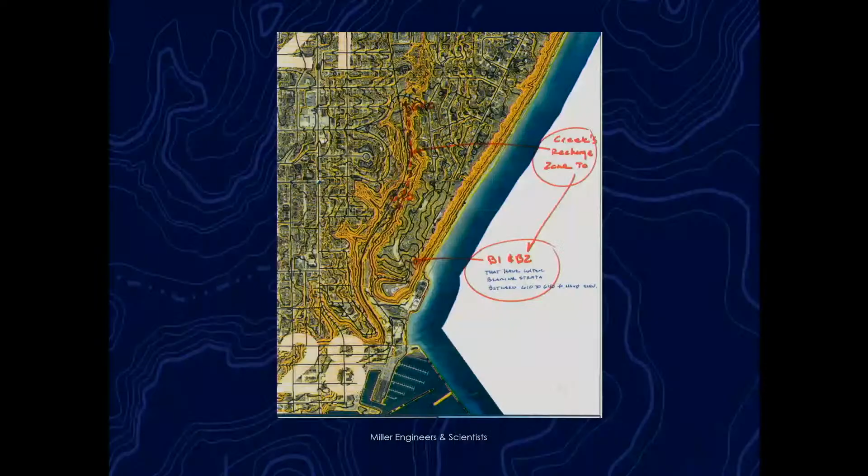So this area is relatively closed off from other groundwater options for supporting this seam. So we have a significant grade drop along this Valley Creek. And so we are expecting that the water that's sourcing this seam is from a portion of the upland of the creek, which is flowing through that sand seam and then further discharging along the bluff face itself.

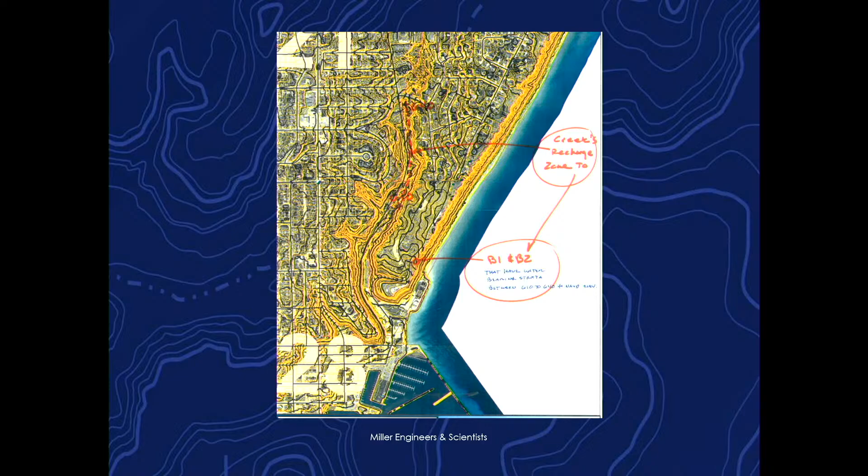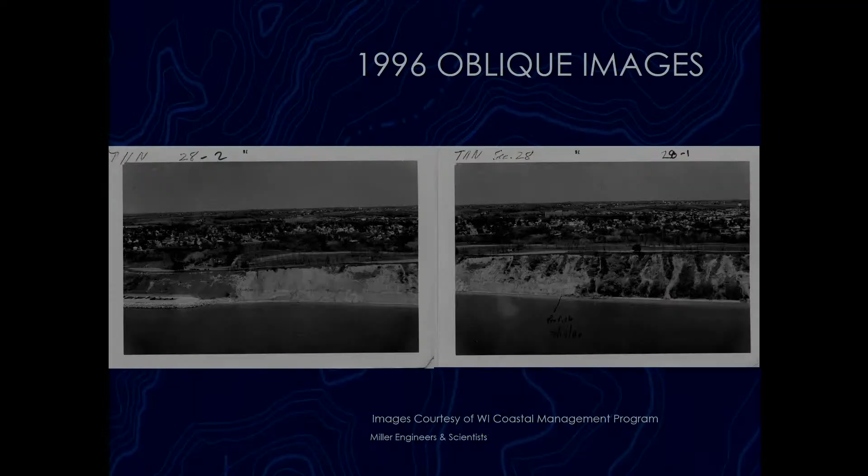The second portion of this design is grading back the remainder of the bluff so that we don't have those steep scarps along the top of the bluff, as well as rerouting a portion of the road that has been the closest to the existing scarps. This will also feature, if approved, an access path that is about 4 feet wide, and it'll be a traversing path that pedestrians can use to access from the top of the bluff to the shoreline and the beach itself, as well as a maintenance access path to improve maintenance of the vegetation along the bluff and any other options that need to be addressed.

So this cross-section shows our borings, and again, we encountered that dense saturated silt and sand seam shown in blue at the lower half to lower third of the bluff. And so because we've seen it on the face of the bluff and within the boring itself, we're confident that it's quite continuous. In general, we have spatially variable sands and seams. But because we have seen that this is relatively continuous along the bluff face as well as further back where we're having our boring, and the fact that we have this water that's continually seeping from further up north, it's a relatively continuous seam that a directionally drilled subsurface drain will be able to capture and hit appropriately.

This cross-section also shows in the dark black the current condition of the bluff face, so the current geometry of that. Again, having the steep scarps at the top of the bluff, having those loose soil masses that are at the base of the bluff. So the dashed line adjacent to it is our recommended cutback in order to create that quasi-equilibrium slope. So some of the bluff crest will be recessed back in order to provide that equilibrium slope and in order to have a safe, usable area. Additionally, you can see that there's the revetment at the toe of the bluff and the beach nourishment that we had discussed earlier.

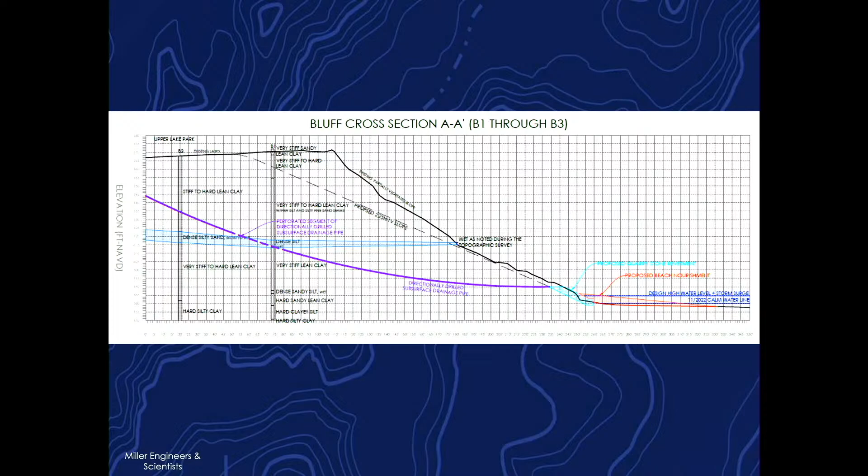So Lake Michigan, its water levels fluctuate as much as 6 feet. It's quite cyclic. Right now we're coming out of the high water level in 2020 and 2021. Currently, this says March, but also within April, we've been right at around average. So we can expect water levels to fluctuate another 3 feet down and to continue that cycle of highs and lows.

This image shows in 2020 how we have rarely any beach adjacent to the bluff toe, but that in 1990, during a low water period, we have a substantial width. So while we are taking up some space with the revetment itself, these water levels that are fluctuating are going to also fluctuate our width of the beach. And also the beach nourishment will aid in that and in creating a larger width beach.

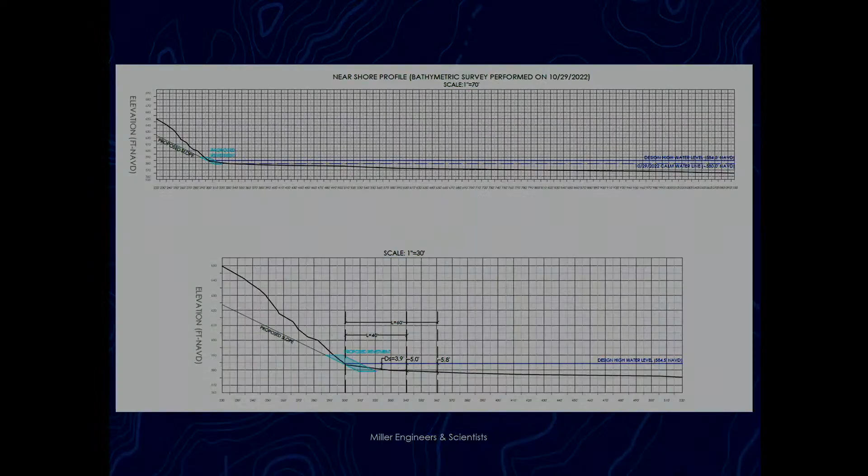So for the schematic plan that we had shown, this is our estimate of probable construction costs. To go through final design and permitting and grants, it is $150,000. We also have our directionally drilled subsurface drain lines to redirect that subsurface water and provide stability in that measure. The bluff excavation and pathway to provide an appropriate geometry. The revetment to protect all of that infrastructure from future high water levels, and the beach nourishment in order to provide an aesthetic beach and minimize our impacts to the natural lake dynamics. And that's in about the $7 to $10 million range.

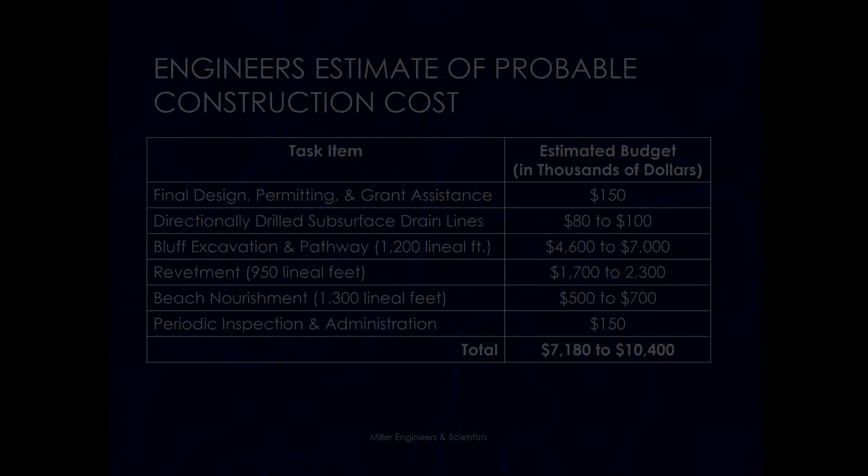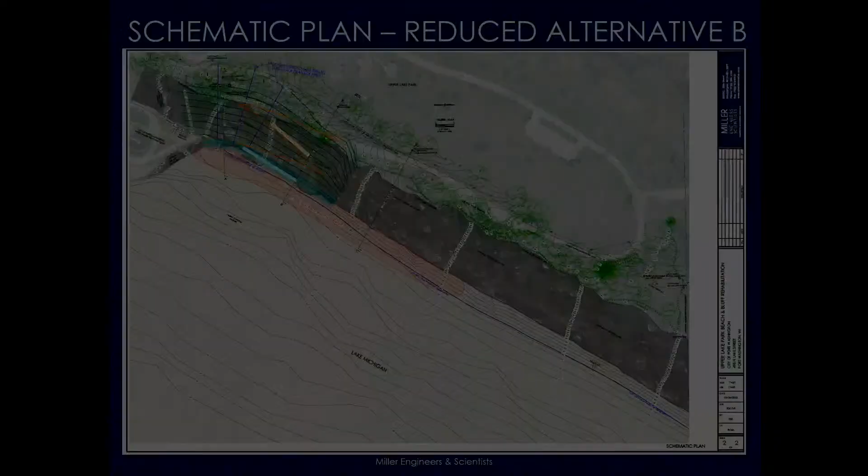Alternatively, we can also look at reducing the amount of area that we are grading back. Regardless, we're going to want to do the directional drilled subsurface drain lines in order to redirect that water. But the amount of area that would be graded back can fluctuate and is really up to the city and its constituents on what you really would like to do with that area. So this is an option in order to reduce the amount of area that's impacted and stabilized, and that would be in about the $4 to $7 million range. Sorry, yes, correct, 4 to 7 million.

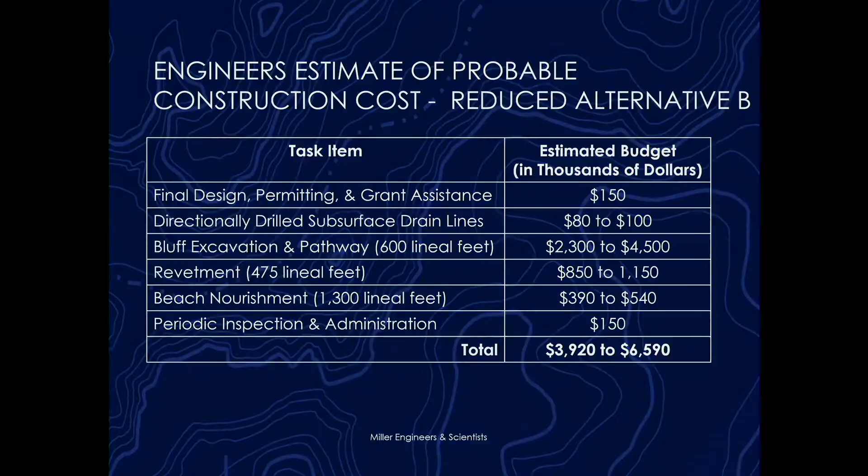So, as Rob said, this portion of the project was funded by Fund for Lake Michigan. They have also received the Wisconsin Coastal Management Program in order to do the final design and permitting of this. A Sea Grant application is pending for further research at the north end. And some additional options include Sustain Our Great Lakes, FEMA, Knowles-Nelson Stewardship. So there are plenty of options for addressing this project

in the future. So the next project steps would be to determine what financing we have for this, and therefore figuring out how much area we really want to be working with and stabilizing in order to provide an appropriate amount of beach for people to use. And continuing to have grant applications, preparing final designs, and then as a first measure, in order to provide some beach access during this summer, is to first reconstruct the portion of the road, because that can be lost at any time due to the proximity of the crest of the bluff to it at this point. As well as installing the directionally drilled subsurface drain lines to provide immediate relief from that, and some minor grading.

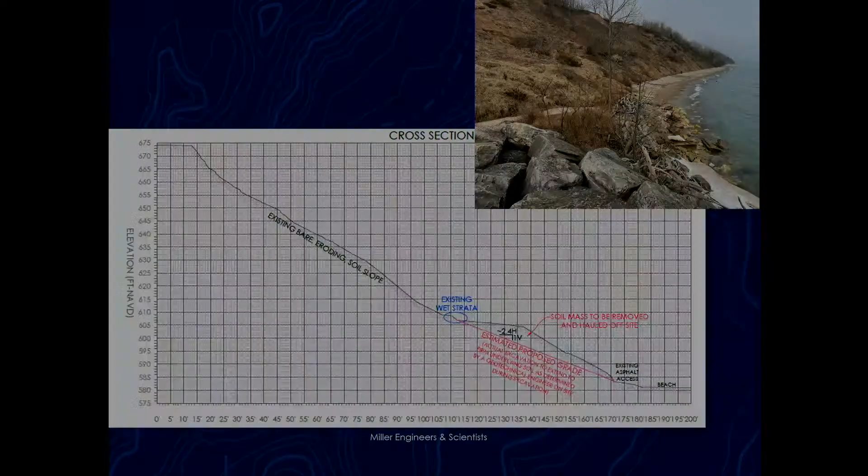So the city had requested that we provide a schematic plan for the minor grading in March of 2022. And here's a figure from 2022 showing that slump that has now prevented access from the wastewater treatment plant asphalt walk to the beach itself. So our plan would be to remove that large soil mass in order to restore that access to the public. And that is all that we have. If you have any questions, I'd be glad to answer them.

Thank you, Emily. I'll kick it off. So when we talk about the bluff instability, is the number one driver of that the drainage seam or the slope of the bluff, or both? Does that work in tandem? Right. So the two mechanisms that are causing the bluff instability are the high water levels that are eroding at the base of the bluff, which we don't currently have because we're at the average water level, as well as the saturated sand seam, and that is what creates the environment in order to have that steep slope.

Okay. And that seam, it sounds like, is pretty static. It stayed in the same spot for many years, as you showed. Correct. And why is that? It runs into harder clay, that's where it comes out, or? So these bluffs were created, and while they were being formed, you do have these random locations that are spatially variable of that silt and sand, because it used to be an old lake bed. So typically we don't see this continuous of a seam, but in this location we do, and that's why there's been chronic issues for several decades at least.

And then the drainage pipe is obviously the number one alternative that we want to do probably in any regard. What percentage, back of the envelope, of the problem does that solve? Just the drainage? Right. The boring? That addresses the further instability that is caused by water seeping. So we don't consistently have water and hydrostatic pressure that's building up within that seam. It comes in waves. So during some periods of time, we're going to have more flow into those seams, and then that aggravates it at a certain time. So that's going to help in that respect.

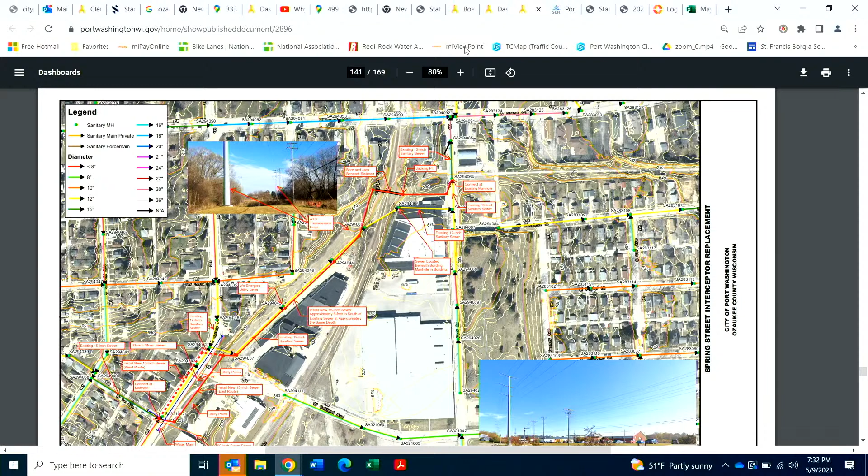And so right now, it appears there's enough budget money between the 3 years that, if their estimate for construction holds, we could do the whole thing. But really, right now, what we want to do is get the design done. We get another opinion of probable cost, and then that'll probably coincide nicely with budgeting time. And if we need to add some more money to the pot, we can do that. Otherwise, when the design is done, we can come back and go to bidding. So this is to approve entering into a design contract with Strand.

What is the cost on that? Am I missing it? So $79,000 for engineering and design. Okay. You probably have to add another $20,000 some for geotechnical engineering. We're gonna need railroad permitting. We're gonna also need some permits with DNR. So right now, though, are we only approving that 79,000 for engineering design? No, so we could get a complete design, we'd like an award for $100,000. So maybe a not to exceed 100,000, or how do we want to do that? Not to exceed would be fine, I think. Yeah.

Do you have any questions for Roger? Otherwise, we'll entertain a motion. I move to award the contract to Strand for not to exceed $100,000. We have a motion by Alderman Gasper. Do we have a second? Second by Cam. Any further discussion? Hearing none? Mr. Chairman? Yes, Alderman Sigwart.

Roger and I talked about this briefly, but they list 11 items that they're not going to do, which are actually more than what they're going to do. Okay, I'm kidding. But I just would like Roger to rapidly go through those and say who's going to do that. Yeah. Actually, it must be getting past my bedtime. I was totally prepared to do this, and I forgot.

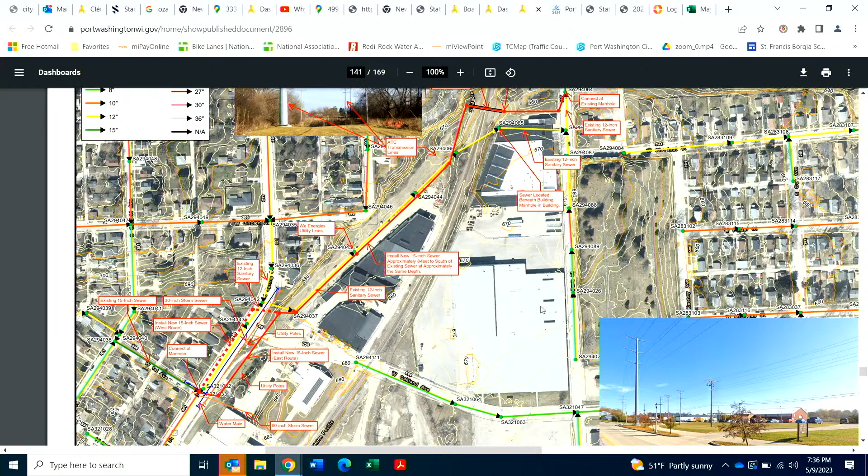Meetings with property owners, the city will do that. However good of a job we do, we seem to care a lot more than our consultants about those sort of things, and try to make our current property owners happy. So we'll meet with the property owners.

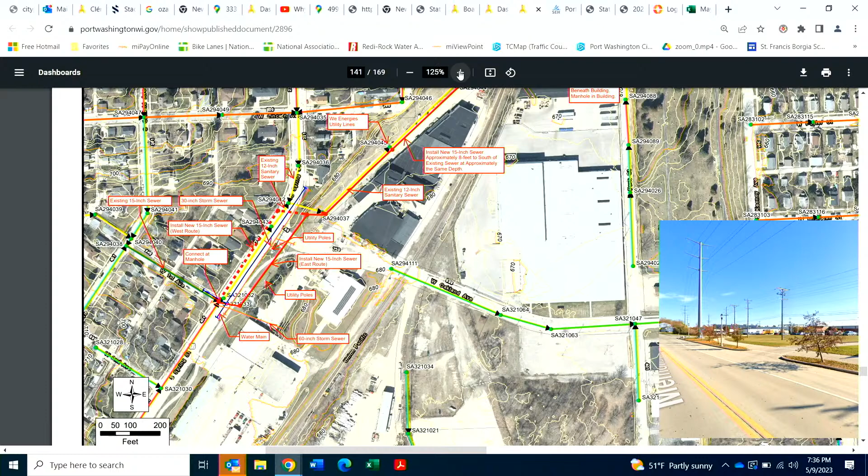We don't believe there's any wetlands out here to delineate. And since this is a connecting highway, we should not have to involve DOT with any permitting. Do those two sentences make sense to you, Roger? I'm just going to read them out loud because I think that's number 10. It is not anticipated that WisDOT permitting will be required since Spring Street, or State Trunk Highway 32, is a connecting highway. If a detour that will impact traffic closer to County Trunk Highway LL going south is required, then state review will be necessary. I don't understand that sentence.

Yeah, I think if they're thinking if they put a road in there, we'd have to divert traffic off of Spring Street. To LL. Yeah. Okay. Then we need it, but our thought is that we should be able to maintain traffic flow through there with some control. I was going to say, I think what they're getting at is that if we need a detour route, as a connecting highway, it's only to a little bit past or right around Portview Drive. That's a connecting highway. Beyond that, it is a full state highway.

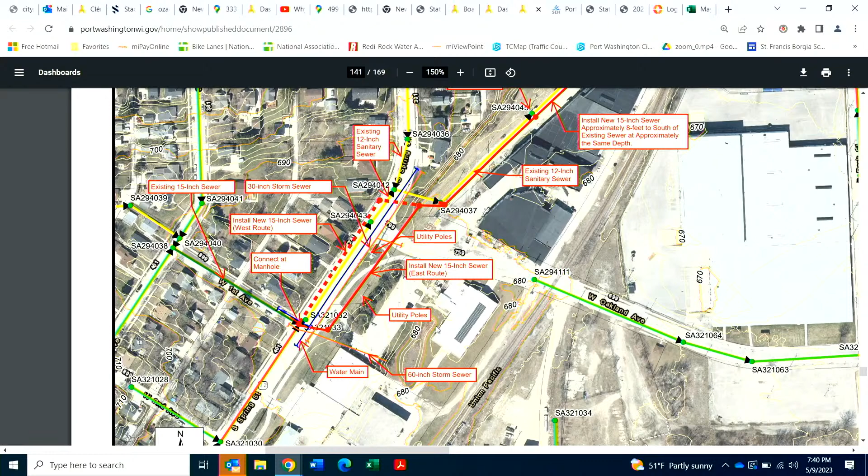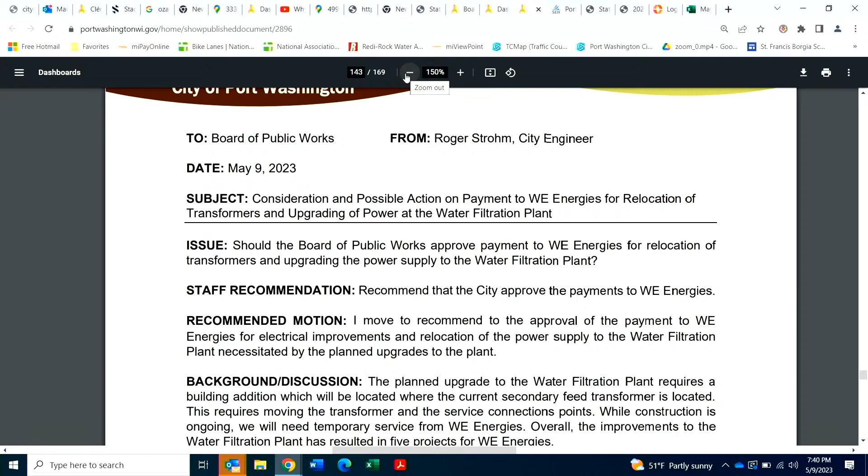Moving on then to item E, consideration and possible action on payment to We Energies for relocation of transformers and upgrading of power at the water filtration plant. I could probably mostly blame this project on Dan Fisher, but with all the upgrades to the water plant, the first things that need to be done is moving the electric lines, the transformers, all on the south side of the plant, and the service connections to the plant on the south side. All that stuff needs to get moved.

And so We Energies has broken it down into 5 projects, which you see here, and that's their cost, and they won't start till we pay them. So we're asking for permission to pay them. And where will the funds come out of? Is it budgeted in?

It'll come out of, essentially right now, it'll come out of water reserve funds, but it'll be part of the $18.3 million capital project that will reimburse that once that loan comes in. Okay. Seems pretty straightforward on this, right? Nothing we can really do about it, right? I mean, we need power. Yeah, okay, so we need to raise our $300 street opening fees to make up.

Okay. And what's that total cost again, Roger? For the, $71,916.68. We have a motion to approve the cost to move the power lines from We Energies for $71,916.68? So moved. Motion by Jim. Do we have a second? Second by Alderman Tierney. Any further discussion? Hearing none. All those in favor? Aye. Opposed? Motion carries. Okay, thank you, Roger.

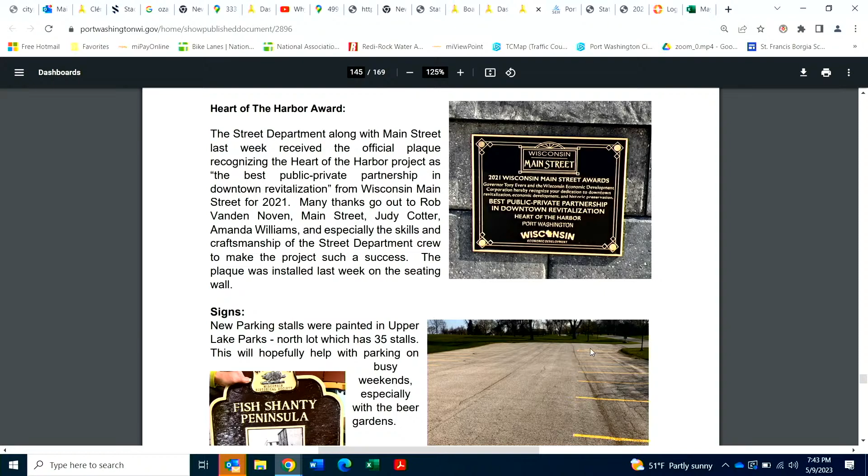And it couldn't have been done without our street department, who took that design and was very innovative in its construction, and spent a lot of our staff time putting it together. So it absolutely positively deserved the award for the best public-private partnership in downtown revitalization ever. So I threw in the ever. We could maybe put that up. I agree. Anyhow, it was a Hall of Fame type of project. So it really was a pleasure to work with Main Street, and I think they feel the same way about working with the city. It was seamless, you know. Yeah, what a great project. I never worked with a better group of volunteers.

On the north side of Upper Lake Park, we've now striped the parking lot so that hopefully that'll encourage people to park off-street rather than on the street, which has been a problem for some of the bigger events up there. We're getting into summer, and so Gerard and Casey are busy improving sewer structures around town. Over the winter, they remodeled the mechanic shop and I think the wood shop too. Brush, to JD's chagrin, is back in business, brush pickup. So we're out there, took 2 crews the full week to pick up the brush that people waited all winter to put out on the curb. So we're out now every other week until June, right?

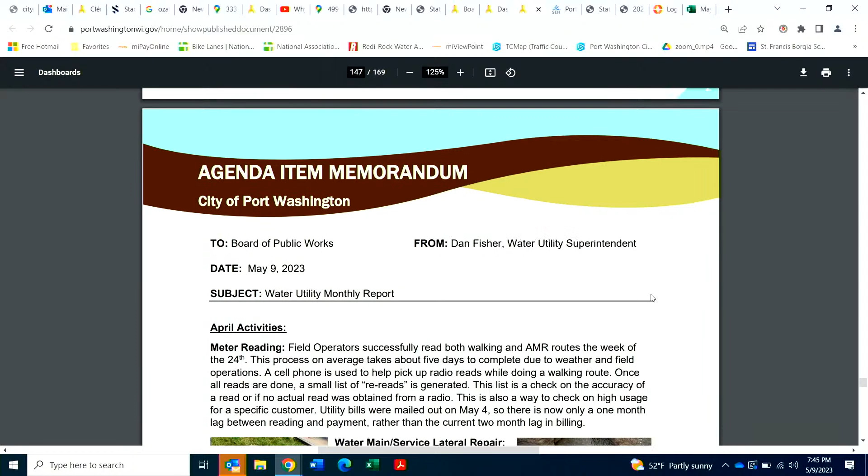First week of June, when we get our summer help, and then the summer helpers staff the chipper, and they go out every single week, which is, I know, greatly appreciated by our residents, and so we'll be out every week, essentially June, July, and August, and then it goes back to every other week until, I believe, the first or second week of October. All the, yes. Yep, so, and so, appreciate that, JD.

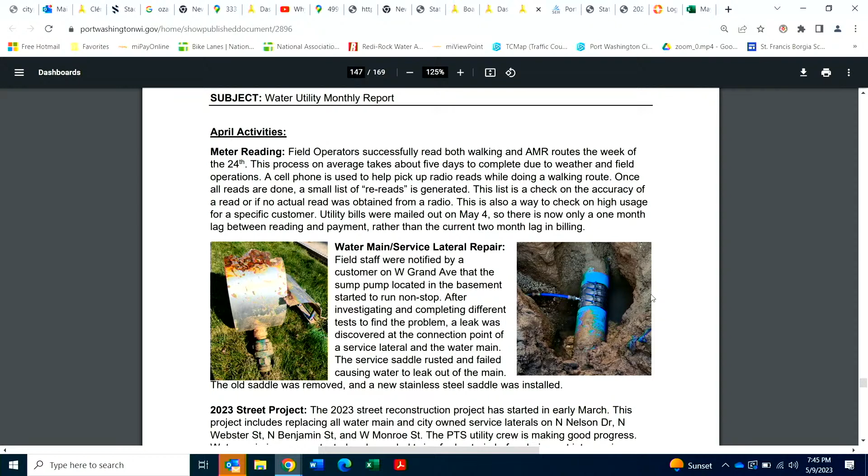And in our water utility, we had a difficult water main break on Grand Avenue a couple of weeks ago, and I'll just skip to the end of the story. It works now, so. But it was a great amount of effort put into repairing it, and so in the end, it worked out great. Super happy to report that our advanced metering infrastructure is in place. So the antenna that you approved last year is now up on the Mineral Springs Water Tower, and so we're just a few years away from having a complete automatic continuous read system out there. I understand it's working exactly as planned, which is a good thing.

And then moving on, I'm going to ask Dan to step up and just talk a little bit about the consumer confidence report. We have minimum reporting requirements every year that's covered in the CCR. But I think Dan put a little extra effort into it this year, and it is up on our website. I'll just say, take it away. Yeah, I'm just going to give a couple of highlights of the Consumer Confidence Report. It's also called the Annual Water Quality Report. This is mandated by the EPA. It's also run through the DNR as well.

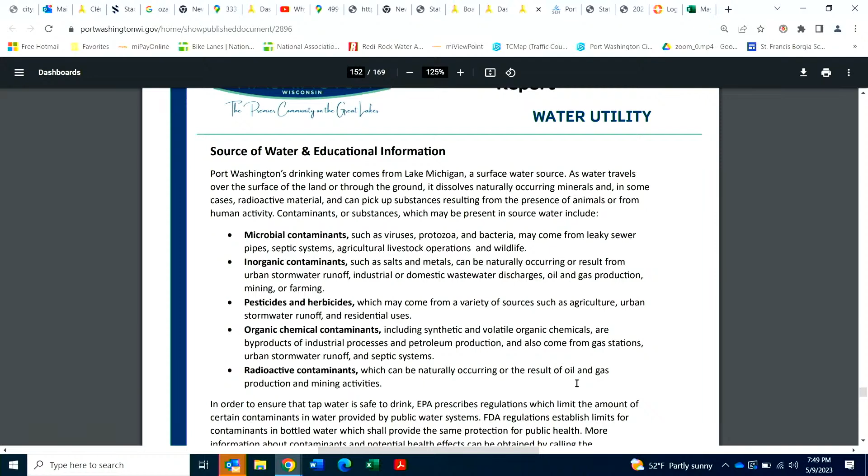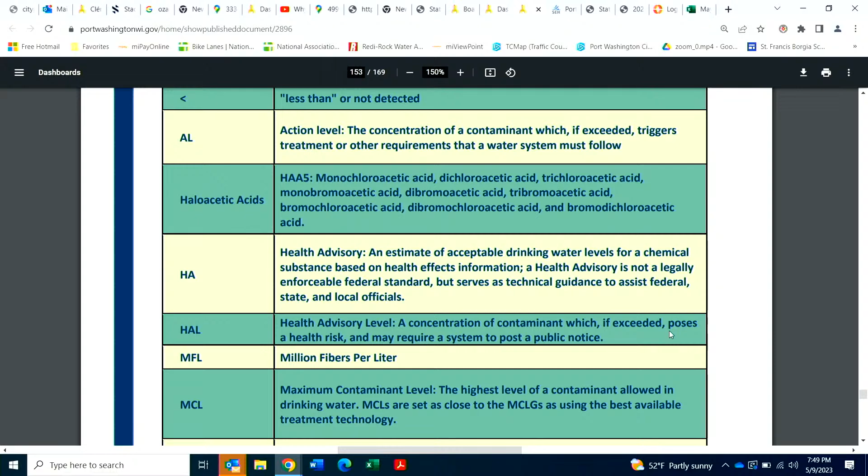And then the main part of this is showing what possible contaminants were detected during testing. Every municipality detects contaminants. It doesn't mean that they are harmful or that we are exceeding any kind of limit. So there's different types of chemicals and byproducts that are sampled throughout the year. This year, unlike last year, we'll be sampling a lot more heavily on unregulated contaminants. So that's basically the DNR searching for problems.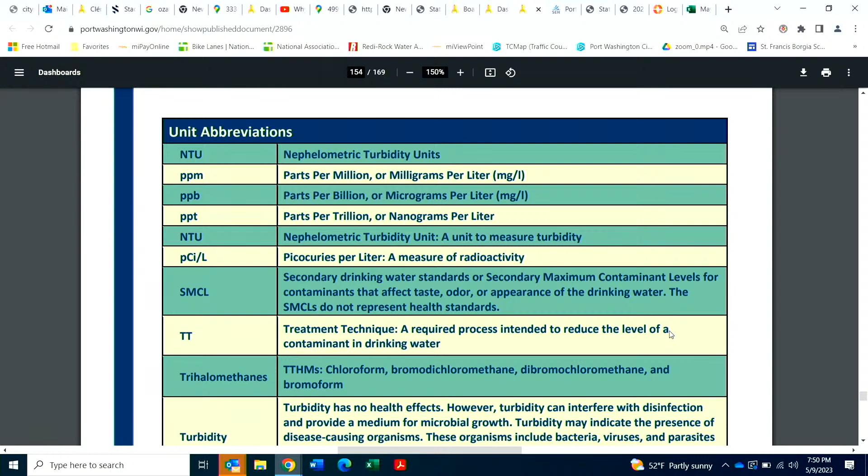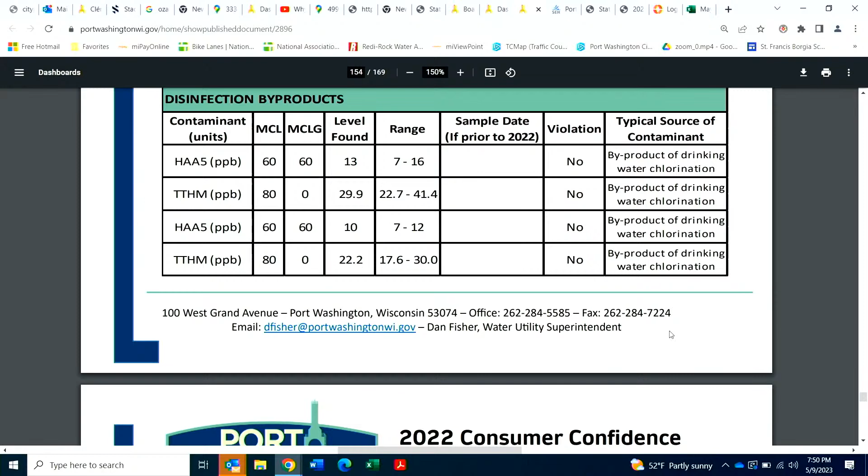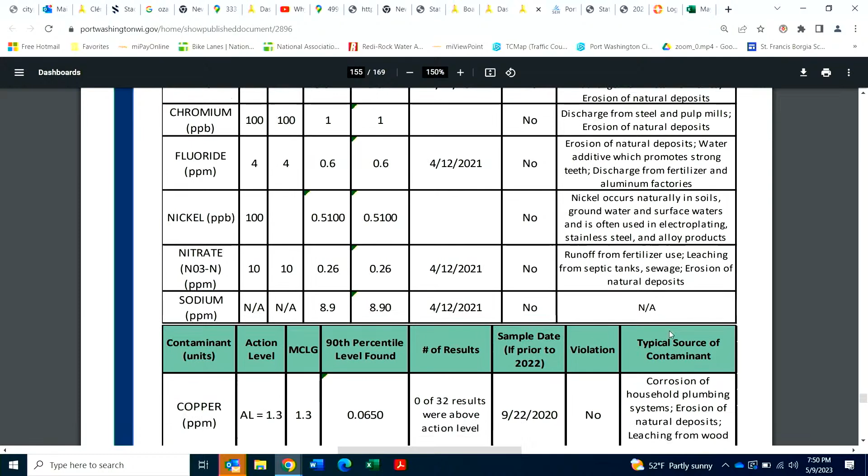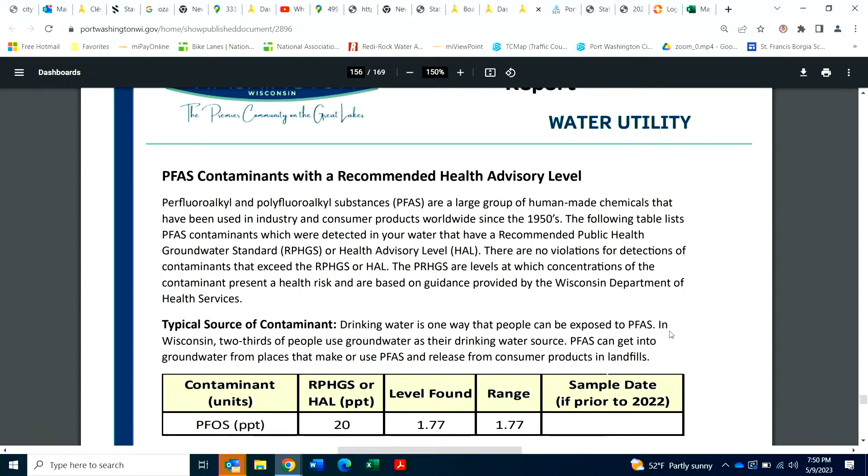And we're also sampling for PFAS. Last year, we took a voluntary sample in the second quarter. Those are the forever chemicals, right? Right. And this year, EPA is mandating that every municipality test quarterly. So actually, we have now 2 quarters worth of samples, along with 2022's results. I'll probably come to you guys a little later with more information on that. Just a peek, we're sitting in a good spot. So we have to show what contaminants were detected, but like I said earlier, nothing went outside of the range causing any concern.

And then at the very end, I just wanted to highlight what the utility accomplished last year, and what we're looking for this year in 2023. Obviously, with the water treatment plant improvement project, it's vital to get all this information out to the public and let them know the process of what's going on and if anything will affect how the water is going to be. So, any questions? Any questions for Dan at all? Thanks, Dan. Looks real good. Appreciate it. Thank you.

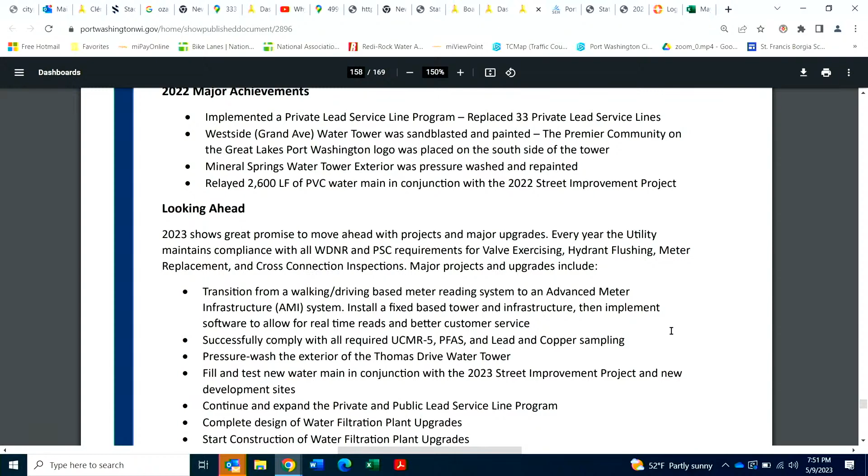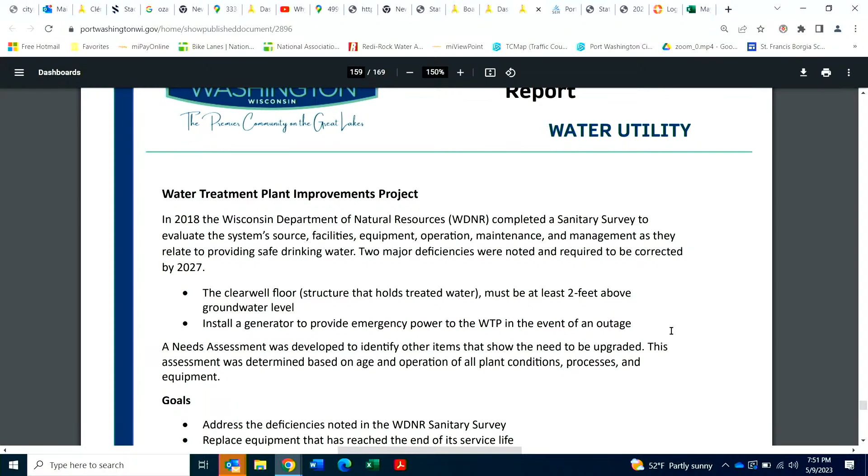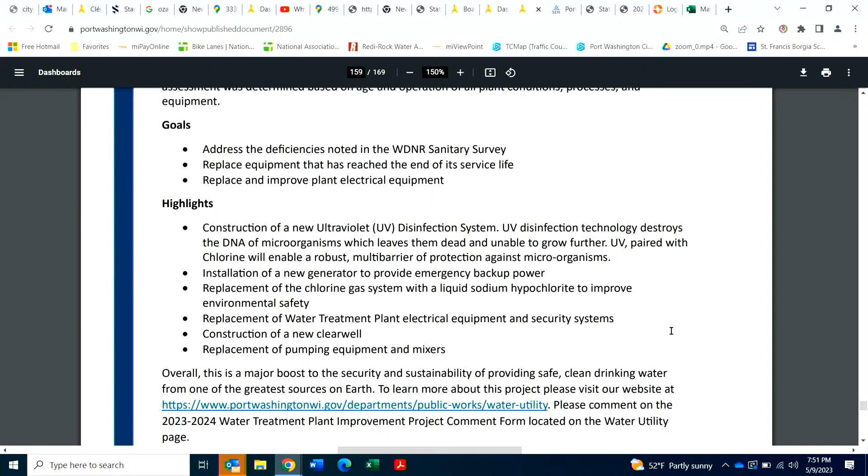Alderman Sigwart. Yeah, I just wanted to comment on the new water bills. They're excellent. I was actually able to explain them to my neighbors, who thought that they got billed twice in a row too soon, because you sent the bills out on May 5th and they're not due until the 28th of May. Right. So now we're reading and then sending the bills out and having them due at a much more normal pace. I'm glad you brought that up. I also want to say that this report is listed on the bill. We have to somehow get it to all the customers, and one of the options is putting it on the water bill, both printed and electronic ones.

Good deal. Thanks, Dan. Yeah, so with the new billings, our new treasurer, Mark Emanuelson, has now put the water utility in a position where they're collecting for water bills with only a 1 month lag time. There used to be a 2 month lag time. So it's in part because of the new way that we are reading meters and getting information to our treasurer.

Jason, can I add a comment here? Yeah, Roger, go ahead. On the CCR and what Dan put together, if anybody thinks that this is routine, piece of cake, everybody does it, I would just suggest that you Google Jackson, Mississippi, and go on YouTube and see what kind of situation they have had. We certainly appreciate the support to do the water plant upgrade because we don't want to be Jackson, Mississippi. I assume they're having problems.

Yeah. Okay. I've been there. It's hot.

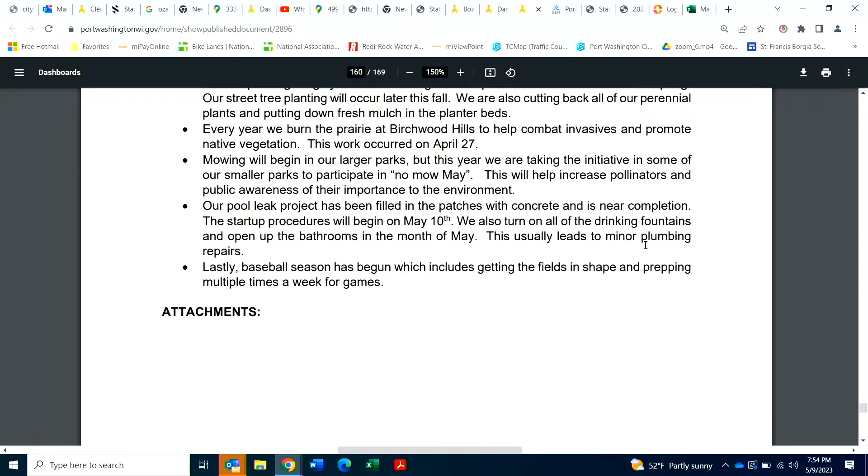Anyhow, no, we're doing a little more. It's something I'm seeing they're doing, I know, in Cedarburg, and I heard about it in Door County, and I know a number of communities are promoting No Mow May.

Looking for a no shoveling month in the winter. Yeah, no shoveling January. It's got to help something.

I don't know. And so here we have to take down the lights. I know the lights are appreciated by everyone downtown, but if we leave them on, they will eventually burn out and look bad. But beyond that, they're not good for the trees to leave on. So we do need to replace them every year. And so we essentially take the summer off. They do spend quite a bit of time putting them on in November, and so once a year is pretty much all our staff can handle.

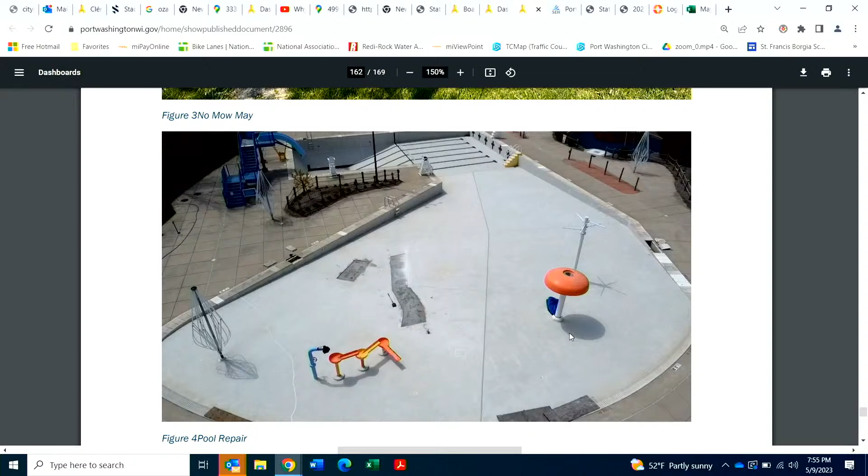So they cut pipes out and installed new pipes. They did all of that last winter. And then last week, Thursday, we put concrete down, but did leave down like half an inch, and the top is what we did today. So leaks fixed. It should be warm enough to swim in the next couple of months. Yeah. All right.

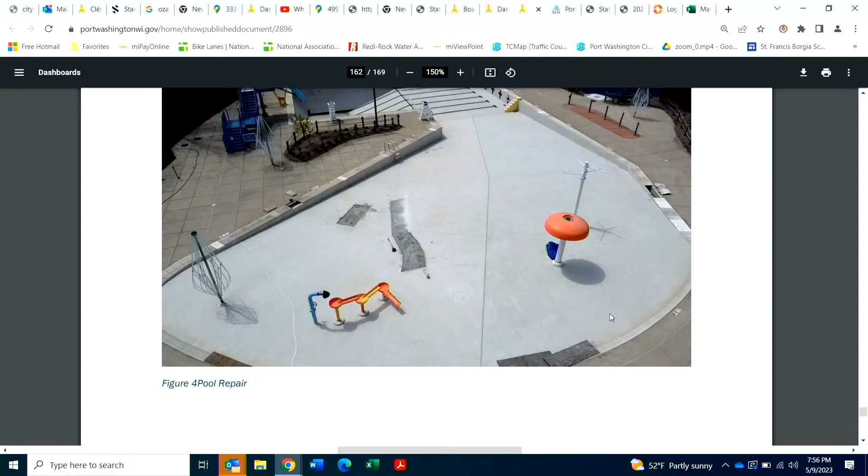Well, the retaining wall, you're talking about the retaining wall that's holding up the planted beds, is essentially failed. It should have never been constructed that way, but it was. And to fix it would either cost a private contractor $80,000 or we find time with our own staff, which we're very limited on, to do it ourselves. And so we essentially have it blocked off because it's a danger. It could topple over at any given time.

And so it's something we're trying to work in, but it was not a budgeted item, in terms of staff time or dollars. So it's a bigger project than it would probably appear to the casual observer. I guess I'll just put it that way. We don't like it either, but it's a big project. Isn't there more of a Band-Aid approach to it rather than a full-fledged one?

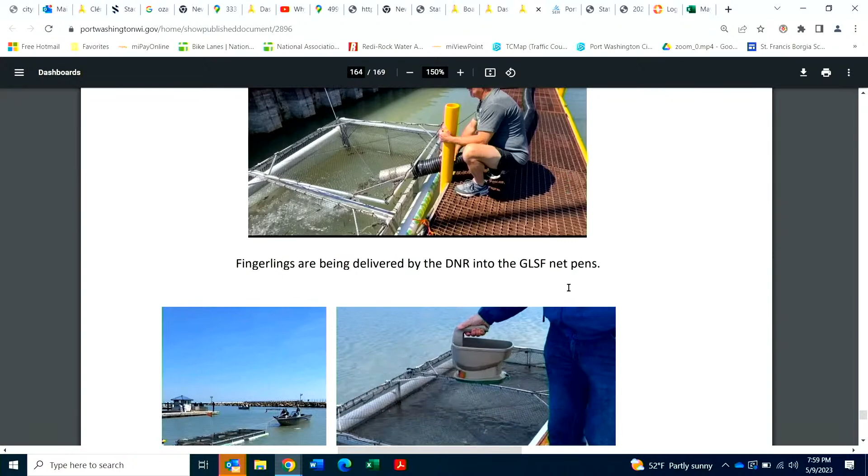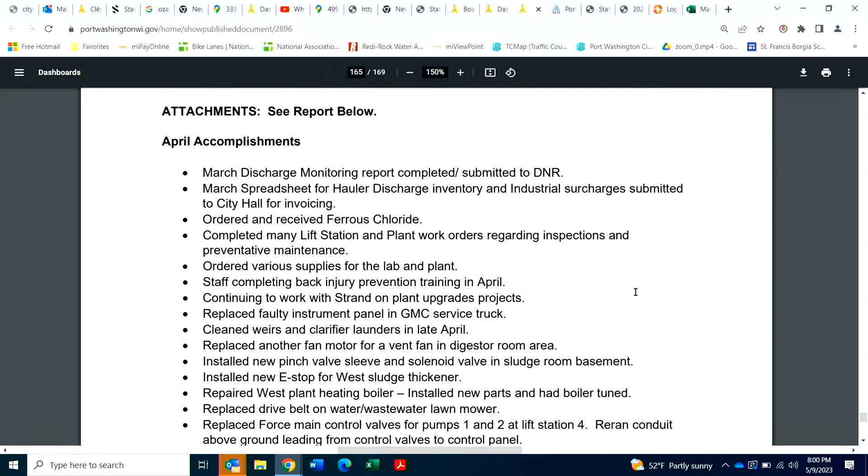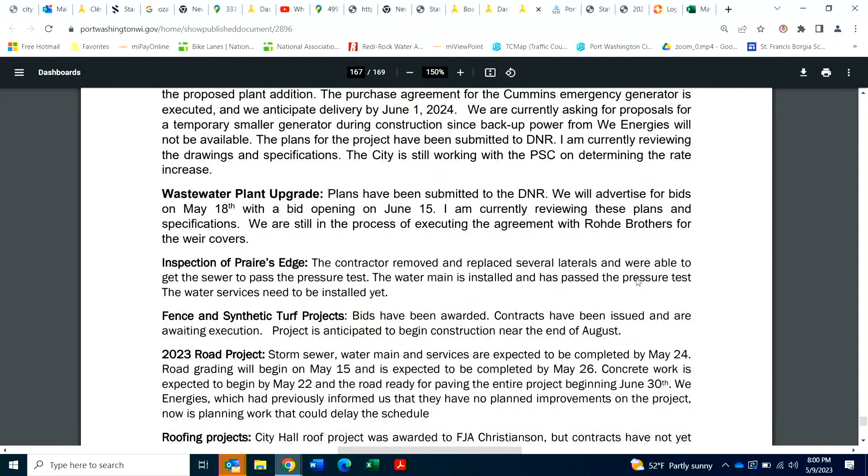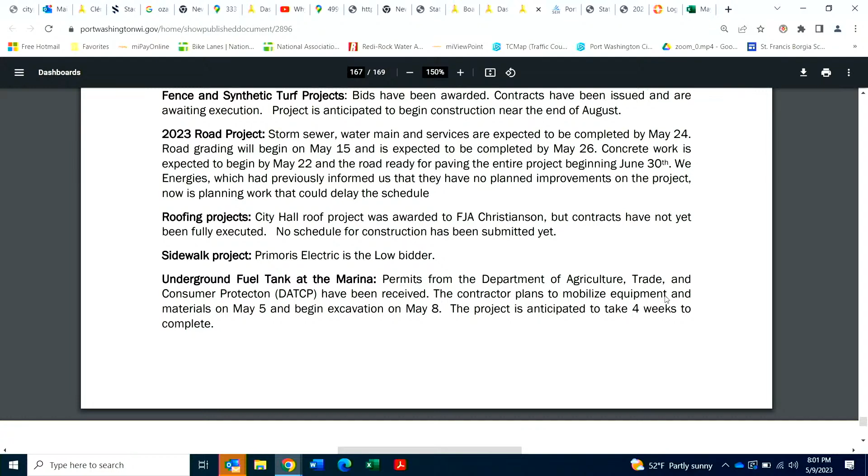And then finally, Dan's report here. No offense, but there you go. And as well as engineering. I'll just highlight that the street improvement project is moving along on schedule. I think the only issue we're concerned about is how long We Energies is going to take to relay some gas mains on the project. But if that goes according to their plans, we should have the project completed on time in July. Oh, and they started putting in the fuel tanks at the marina yesterday.

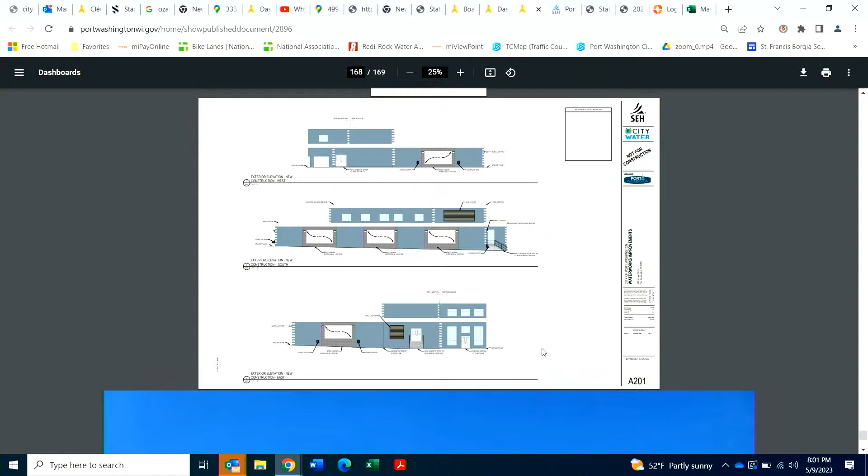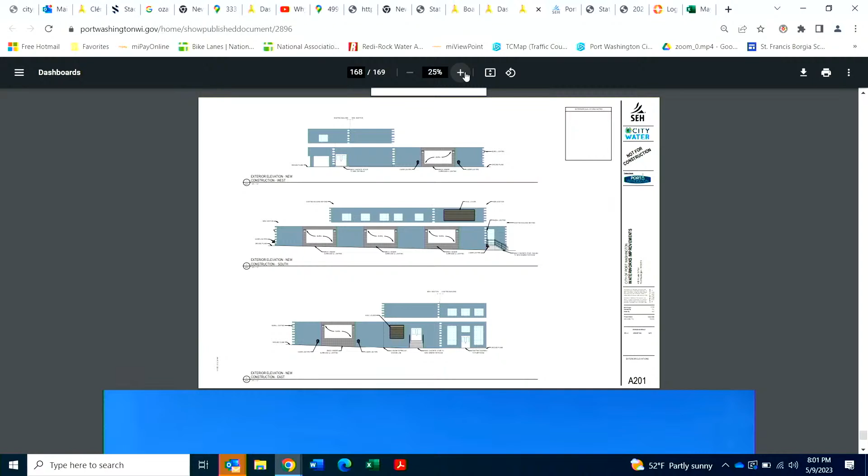And then real quickly, I think this will be the last thing we have to talk about, but we had a public information meeting for the water filtration plant last night. It was fairly well attended by interested parties over at Newport Shores and at the high rise. And so this is one of the renderings, gives you the west, south, and east elevations. We can't put windows on this building because this is essentially the holding tanks for the clear water. So we're proposing some murals. Those have been well received. The new paint color has been well received. We're matching the exterior of the building. The brickwork framing the murals will be the same type of brick that's on the front of the building where the fountain is.

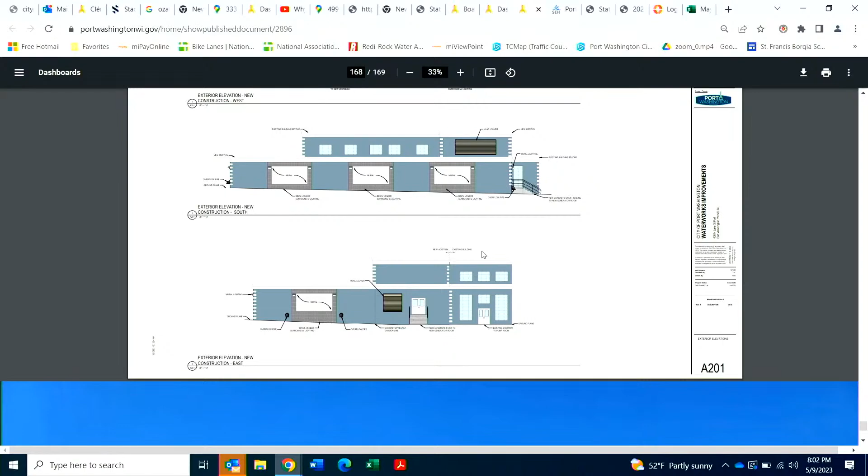We have our designer SEH exploring the possibility of lowering that two-story section where the generator will be, and so stay tuned to see if we're able to lower the entire project down to just one story, or possibly even move the location of the generator somewhere else. So that's this part right here. And then today, same thing at design review. We presented this rendering, and with the exception of just a few comments regarding landscaping and supporting the effort to try and remove that two-story section, that was approved by design review. And we anticipate putting this project out for bid in what month, Roger? Okay, looking at July right now for bidding.

I think that is it. All of the 169-page board report that I'm sure you read in the 3 days that you had to look at. I'm glad you got it to us in enough time. Yeah. By the way, John Crane's little airplane guy that takes pictures really does a nice job, okay?

How many bidders would you expect will get on a project this size? I mean, I got to think certainly Madison, maybe Minneapolis, I'm maybe gonna guess Chicago. 5. Go ahead, Roger. I had that discussion with our engineer, so Rob's right, probably number-wise is 5. They really expect the Wisconsin companies to bid. Maybe you get somebody out of Northern Illinois, but in their experience, a recent project they had in the Twin Cities about this size only drew local bidders. So, there's plenty of work out there. Right. So he said you essentially got to get up to about 30 million, and then you get a little bit more regional bidding. So I'm expecting 4 or 5 big ones will bid it. That's a good turnout, though, 4 or 5. Yeah, okay.